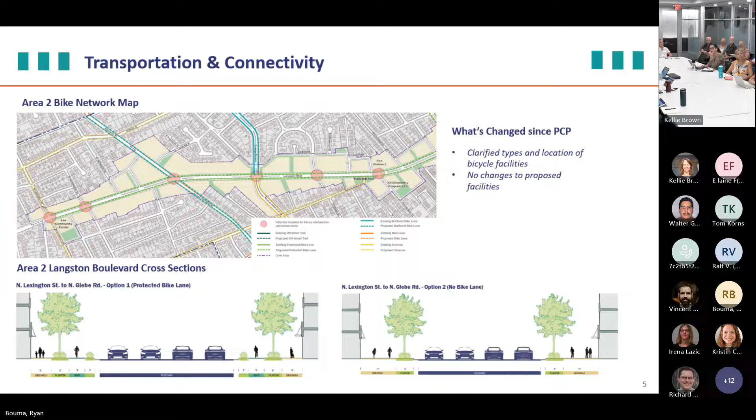So in Area 3, there are 6 additional intersections identified in the draft plan for future study. In this area, the most critical part of the neighborhood that needs the street grid expansion is really east of North Woodrow Street. Here, the plan recommends new east-west streets to connect not only the existing multifamily, but the planned multifamily in the future, where there are large existing blocks that just need to be broken up to make it more walkable. We also believe that by creating these parallel roads, we can minimize local traffic along both Langston and Cherry Hill Road.

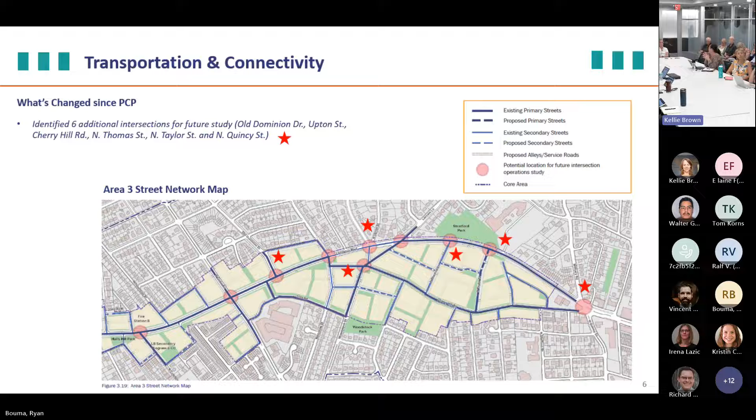Then west of Woodrow, the plan recommends studying whether a segment of Cherry Hill Road can be closed to create a future public plaza. Obviously, the closure of the road would require coordination with the state, along with additional analysis to make sure it's feasible and makes sense from a safety perspective. It also needs to be coordinated with whatever improvements we do to the intersection of Langston and Old Dominion—it's all pretty much related.

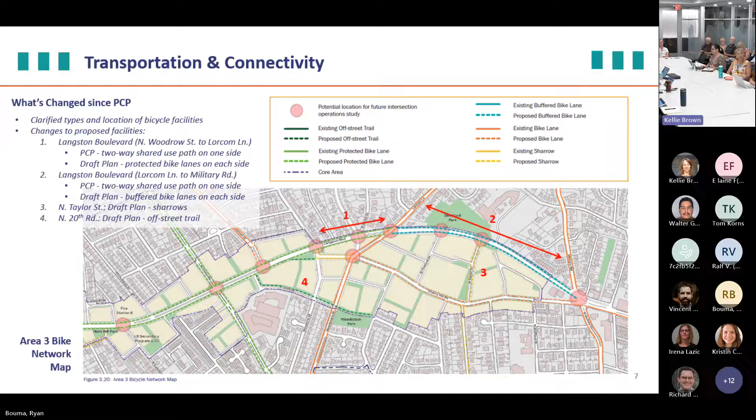Next slide, these are the cross sections for Langston Boulevard. Throughout Area 3, the corridor itself, not only the land uses and topography, but also the right-of-way changes significantly. So for this segment of the corridor, there are 4 cross sections, really trying to accommodate for the different land uses and potential for redevelopment, as well as the existing right-of-way. All of the cross sections include dedicated space for bicycles.

However, from North Glebe to Lorcom Lane, which are the first 2 cross sections, there is enough development potential to expand the right of way and provide separated bicycle facilities, meaning protected, with a landscape strip that buffers bicyclists from the travel lane. Whereas between Lorcom and Military, that's not really the case. We've got topography issues, and very limited potential redevelopment in that area. So the only potential there is to reallocate the space we have between the curbs and accommodate dedicated bicycle facilities, basically striping with some kind of buffer or vertical delineators to visually separate the space for drivers and bicyclists.

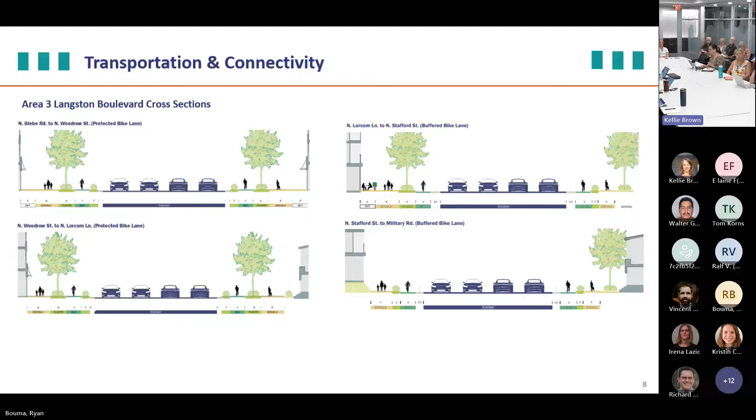In Area 5 West, the plan identifies 7 additional intersections. Again, these are all based on community feedback. We listened, we heard where people were concerned about safety. In Area 5 West, the most critical spot for expansion of the street grid is east of Spout Run in North Highlands, just north of Langston Boulevard. This is to support the future multifamily infill and redevelopment we foresee happening there, which is important because of its proximity to transit, to the metro, and to improve access and circulation through the neighborhood. If you take one drive down any of those roads, you'll realize you can't connect from east to west without going onto Langston. So this will help with that.

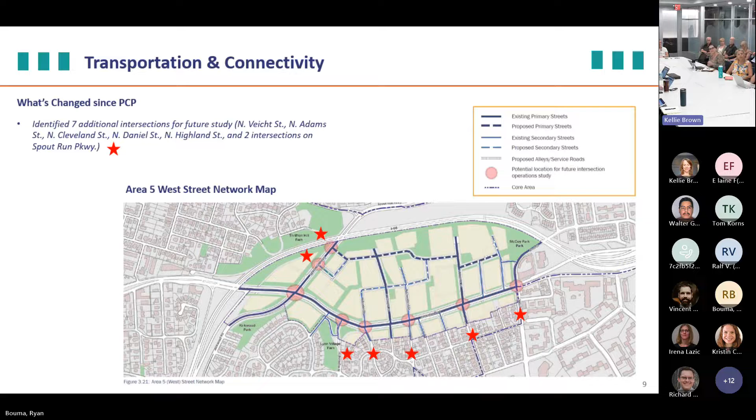Next slide. In Area 5 West, there is sufficient right-of-way to provide the enhanced bicycle facilities without having to rely on redevelopment to make that happen. The conversion of the cross-section from 6 lanes to 4 lanes would include enhanced bicycle lanes, really protected with large buffers, and wider sidewalks. Of course, all of that would require coordination and approval with VDOT. It's not something we can just do automatically.

In the PCP, the cross-section for this segment of Langston showed a 2-way shared use path on the north side. You will see now that in the plan, we're proposing enhanced bicycle lanes on both sides, which again helps distribute and make it more accessible for east and west traffic, or bicycle travel, along Langston.

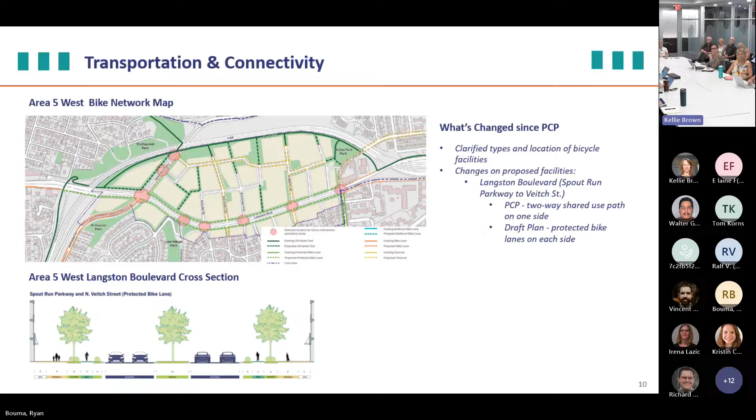So Area 5 East, the PCP didn't really identify any intersections for further study. However, we did hear from the community through our recent engagement, particularly from residents of Palisades and others like Park Georgetown, the need to identify both North Quinn and North Oak Streets as important intersections for future studies. So we will be doing that in the next draft of the plan.

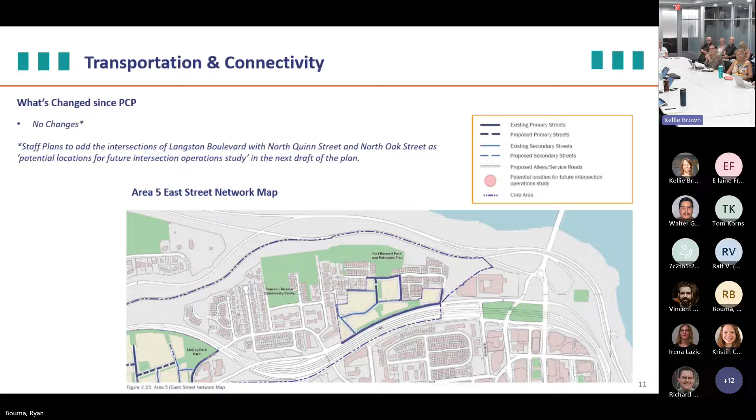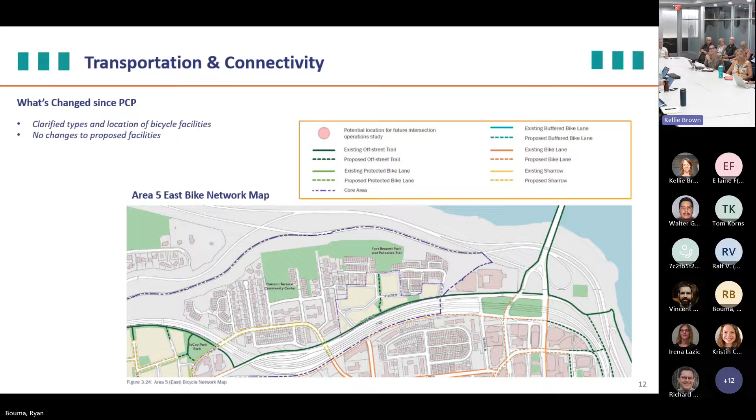So the last slide, we can start the conversation with the committee on the design guidelines for the public realm. Those are intended to support the transportation policies in the plan. They provide recommendations for enhancing connectivity, for designing complete streets, alleys, greenways, for consolidating access points and driveways so we can make it safer, and for creating welcoming streetscapes. Without getting into a whole lot of details, there's a lot of material on that subject, but I'll open it up to the committee.

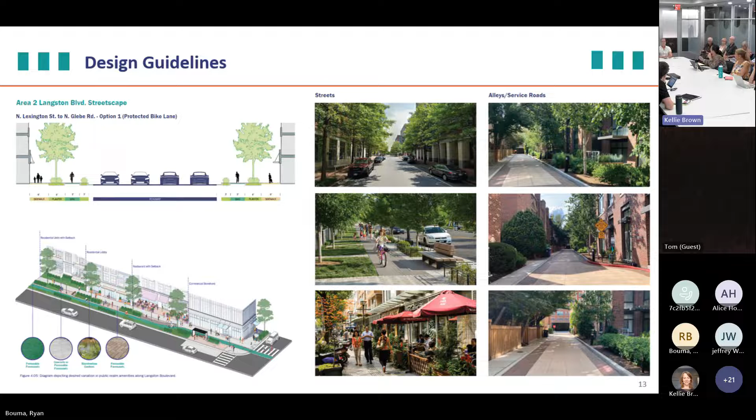Okay, seeing no further comment, let's move on to public spaces. Sounds good, oh, and Ryan has anticipated that.

Thanks, Ryan. The policies for public spaces really focus on, number one, expanding the public space network we currently have by achieving new privately owned public spaces with redevelopment, and also by providing a variety of space types, activities, uses, and sizes that can support a diverse population across different ages and cultures. Lastly, expanding the network of off-street pedestrian and bicycle corridors to ensure development includes connections to those public spaces. So we need both, they're not exclusive.

Currently, there are 24 publicly owned spaces in the planning area, the entire planning area, not just along the corridor or in the core. They all have varying degrees of accessibility and types of amenities. One thing we do know is that there are large barriers in terms of connectivity, Langston being one of them, and certainly there are gaps that prevent people from getting to these spaces easily.

So through this plan, there is a potential to achieve an additional 28 privately owned public spaces in just the core area, which is the area that needs it the most.

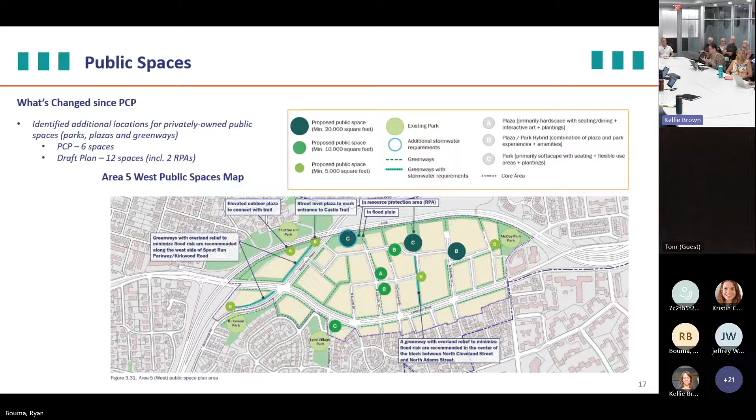In area 5 East, the plan increased the number of parks and plazas by 1, for a total of 2, in addition to the greenways. We've certainly increased the number of greenways from what we proposed in the PCP to the plan. Again, there are different forms of public space, linear public spaces that are meant to connect or create spaces for bicyclists and pedestrians. They're not for recreation, but they still add landscaping and biophilia.

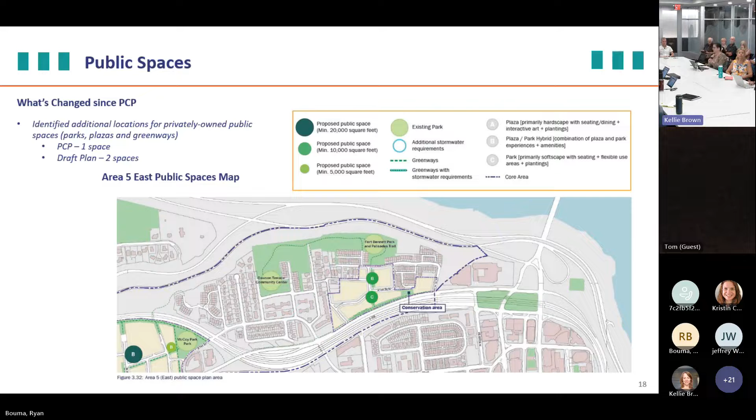The design guidelines for public realm are also intended to support the public spaces policies in the plan. They provide recommendations for designing new parks and plazas, as well as for existing and new greenways. If you look closely, the design guidelines include very specific recommendations for development along the Custis Trail, which we consider an existing greenway, to ensure proper building frontage or setbacks, accommodating sufficient space for pedestrians, cyclists, and landscape areas, really expanding the green quality of those trails or greenways.

And that's it, I think we can have discussion on that. Okay, wonderful, any questions, thoughts, comments on public spaces?

It's great that we have a number identified, but we really need more. There's just not enough public space up and down this corridor. I think the plan recognizes that, but there has to be some way we can also identify where other spaces can be. Theoretically, for example, we have the cell phone tower by Lee Harrison Center. It's privately owned, it's occupied, but it's still green, and it's something that theoretically could at some point become green space, a park of some type. So we should be identifying all of those types of things specifically in here as opportunities.

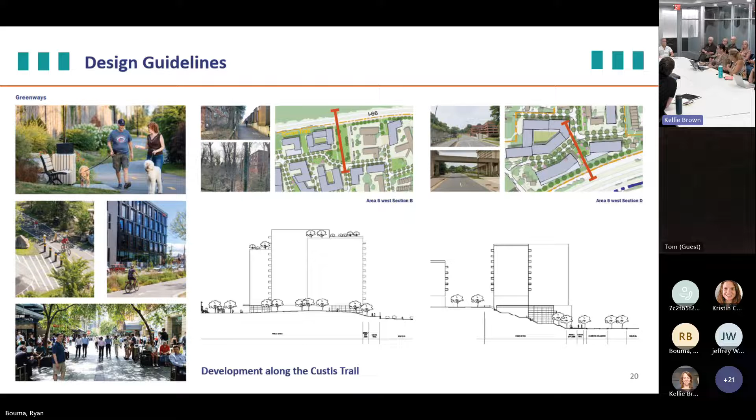So talking about that cell tower lot there, if these people never choose to sell, should we be thinking of some incentive to encourage them, since they have the space, to give them something so that they would want to at least have the space used? Certainly, any ideas like this we should be acknowledging, creative ways to have it, because we're already saying public-private, so that's fine. These publicly used private spaces, that could be one of them. So yes, you're right, Commissioner.

We will be looking at all of those options between now and when we put out the next draft, including seeing if there are other potential locations to add more public spaces, and then preserve the ones we have. We have a representative from Leeway Overlee here tonight, and he's very concerned about their park. Yeah, it's a great little park there. It's not actually that little, it's actually a pretty good sized park.

I would think that if I owned something with a cell tower, I'd go like, oh no, the radiation, I need to get away from it. But if somebody approached me and I knew I wasn't going to sell it, and there was some plan that could make it more attractive with some sort of incentive, I'd probably think about doing it. You can lease it, whatever. We need to be creative with this, because technology changes - it used to be a microwave tower, that went away, now it's a cell tower.

Jim, thank you so much for underscoring the importance of green spaces. As you know, the community or the Lee Center is very concerned - it's actually 1.6 acres that the county owns. I know the plan mentions that potentially being used for affordable housing or some sort of co-location library. I would really encourage staff to consider that whatever gets built there does not exceed the current footprint, so that we could preserve more of the green space. I think it's really critical to do that. I know the president's here as well, and he'll be commenting and providing a more thorough overview.

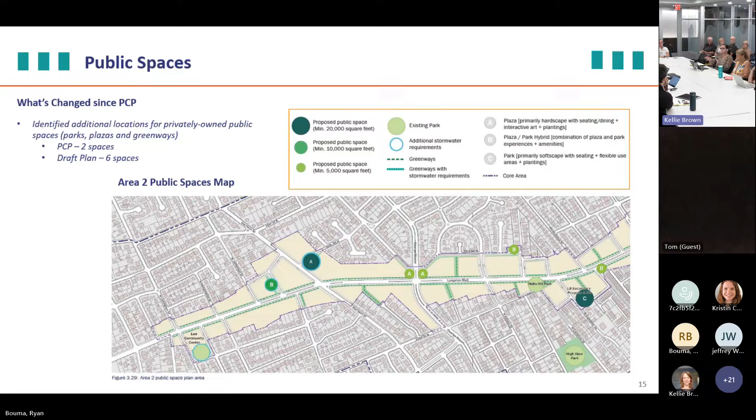But overall, in general, whether it's a retail use or not, we'd still like to see frontage, so a lobby may be perfectly fine. Within, if one of the street types says 80% or 85% for the primary or secondary street frontages, of that we want there to be active uses. The active uses may be retail if that's what the ground floor priority areas designate, but if not, they can also be lobby areas or meeting rooms or things that don't have blank walls. So there's fenestration requirements as well.

And we've done this elsewhere around the county, like out the Pike, everybody knows out on the Pike. So we've done that along the Pike and other areas.

I'm asking because I'm just thinking out loud here. I'm wondering, does this really do much for us? Because I've seen this other places in the county, we require there to be something on the ground floor, but I don't really see the space activated in the way we'd like. I don't have a better suggestion right now, but Centro is a great example that came online at George Mason and Columbia Pike. We have this private-public space, it's not active at all. I've never seen anybody out there. It's a big grocery store, so people come in and out, but they're not lingering.

I don't think this is a bad idea, but I'm wondering if we need to tweak it and think more about whether the idea is to create a community kind of space where people might linger for 15, 20 minutes. I think it's also about safety, how do you have eyes on the space? Maybe that's even residential frontages, but are there entrances that people are coming in and out of that space, so it can be welcoming but also feel safe, not turning your back with backdoor uses onto a public space.

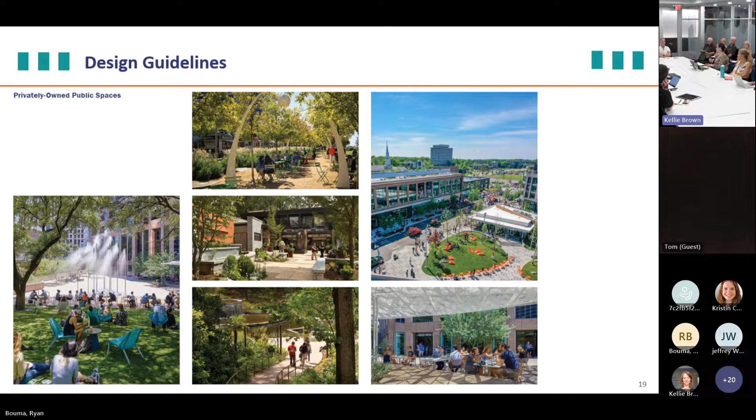So the policies for sustainability and resilience really focus again on expanding the tree canopy coverage. We talked a little bit about that, and planting areas throughout the core, as we know that's the area with the most impervious surfaces. Also providing green roofs as a means of expanding pervious surfaces wherever possible, reflecting biophilic design and connecting people with nature.

Supporting multimodal transportation, electrification of transport and micromobility to reduce greenhouse gas emissions. Embracing the use of renewable technologies, decarbonization and energy efficiency within buildings. Enhancing resiliency through the use of clean backup power technologies. Promoting flood mitigation and protection by providing additional runoff detention or overland relief corridors wherever possible along the corridor, and reducing or minimizing the impervious surface coverage along the corridor.

And then lastly, but not less significant, is protecting the natural surface and groundwater assets. That's absolutely important for the corridor and for the bay.